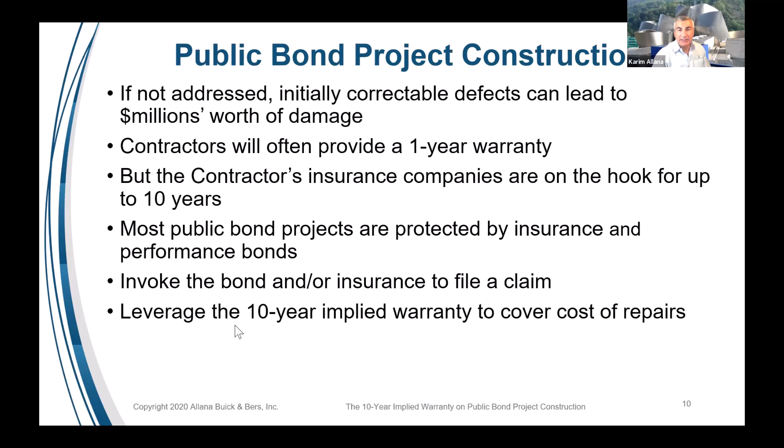So there are lots of mechanisms. I'm not a lawyer, so I'm going to skip this and let Ritchie really dig into this issue and talk more. But I wanted to bring it up because it's an important thing to understand, and there are case studies I'm about to go through that involved bonds, that involved insurance, and involved all of these things.

The common type of defects we see in new construction are water leakage—that's probably the number one, 70 to 80% of the time it's water leakage. The remaining 20% of the time it's air conditioning issues, cooling and heating issues, comfort issues, condensation, fire suppression systems not built right, and hot or cold water delivery systems. A lot of them are functional things, but the thing about leaks is that leaks get hidden.

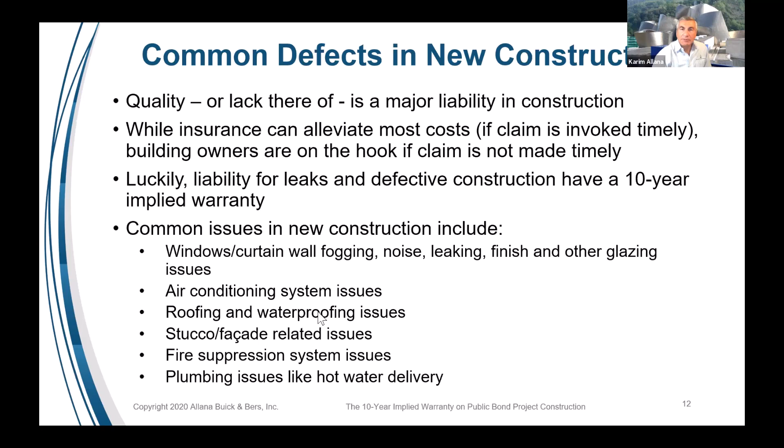Often a building fabric leaks and the water gets soaked into the walls and the ceiling assemblies. You don't see it on the inside. You look at the building and think you don't have any leaks, but the facade is leaking and the water is staying contained in a wall cavity. You open a wall cavity and it's full of mold, so it's something you have to really look for. It's not always obvious, and I'm going to talk about this.

This case is one of those where it's a community college, newly built from a bond project. It's been leaking, probably from the day it was built. And because the issues didn't change, the windows were leaking and the walls were leaking, and those leaks were going concealed behind the wall cavity, so most people would not even see it. And we'd gone through a big drought cycle, as you recall.

This project was completed in 2017 - in 2018, 2019 we had a drought going on during some of those times. Actually, the project was not completed in '17, I'm sorry. This project was completed in the 2012, 2013 timeframe - that was a typo. But it was not until 2017 that somebody noticed there was a problem. So it took 5 years after the project was built for somebody to notice the problem.

We're going to talk about it because it cost $12 million plus to fix, and most of that had to do with water intrusion. It's not a huge building - maybe a $35 or $40 million construction cost, I forget exactly. But it took almost 25% of the construction cost to fix it. So it's very significant, and it's important to understand.

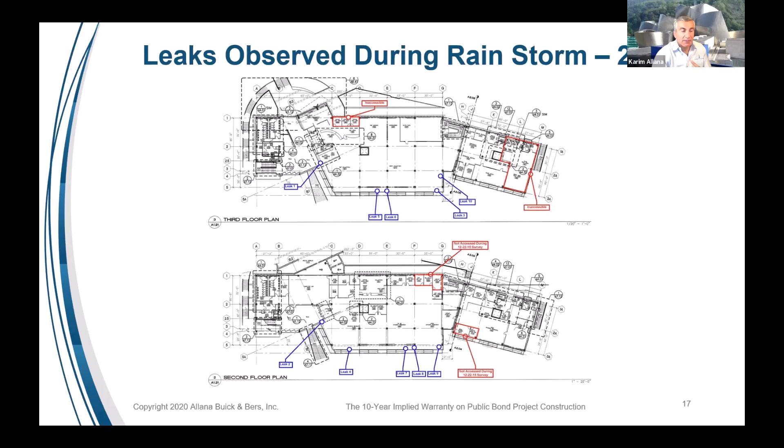In 2015, I think we had a very heavy wind-driven rain that happened in January - during that December rainstorm. It was December 22nd, 2015, when during that rainstorm, somebody happened to be walking through there and saw wetness. They put some protection down and took some pictures of leakage where they could actually see water coming through. But because of the wall coverings and all the sheetrock and insulation in the walls, these walls appeared to be all dry. Nobody really knew the extent of the damage.

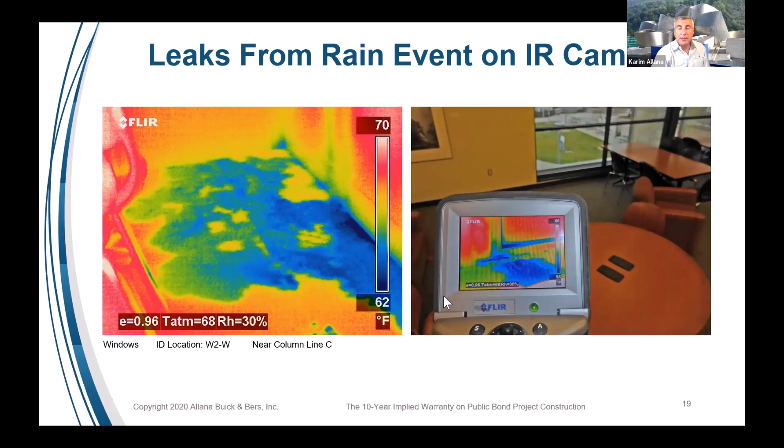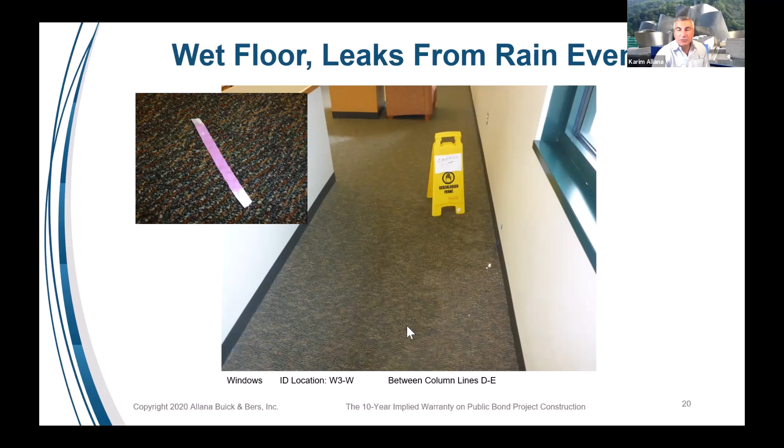So we were sent out in December to look at the leakage. The carpets looked dry visually - we couldn't pick it up. But when we put an infrared camera to it, you could see the dampness, all the water accumulating on the carpet. You can see they put caution signs up, and in the carpet you could kind of see where there's a damp spot. When we put a moisture sensitive strip on the carpet, it lit up - we knew this was really wet, and you could touch it and feel it. But this type of carpet really hid the moisture well, and with some small rains, nobody could really tell. It took years for this issue to even get discovered.

As with heavy rains, we started noticing some damage at the ceiling level, in the corner of the ceiling. We even saw some damage on the ceiling tiles, in one particular area where we had water underneath a podium or entrance plaza on the second floor. Underneath that entrance area, we could see some ceiling damage.

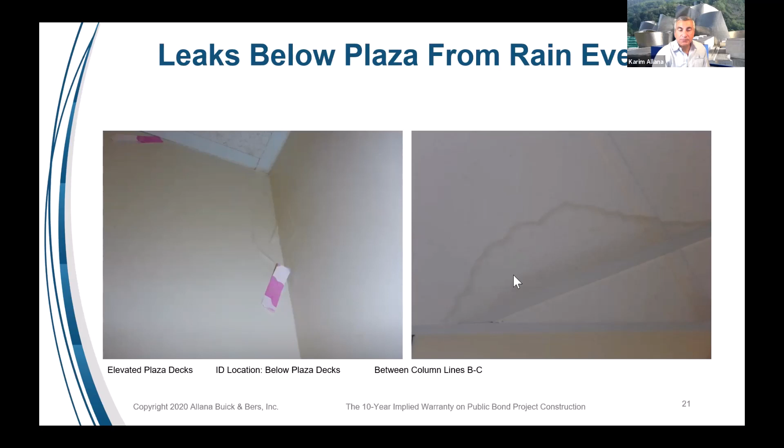So the district hired us to figure out what was going on. Part of what we did was a visual inspection to look at what was wrong, and we also did some water testing. We looked at this from a water intrusion perspective to see why the water was actually intruding, and we ran negative pressure testing. The negative pressure testing allowed us to see if there was leakage through the product, or leakage through the wall assembly, or what.

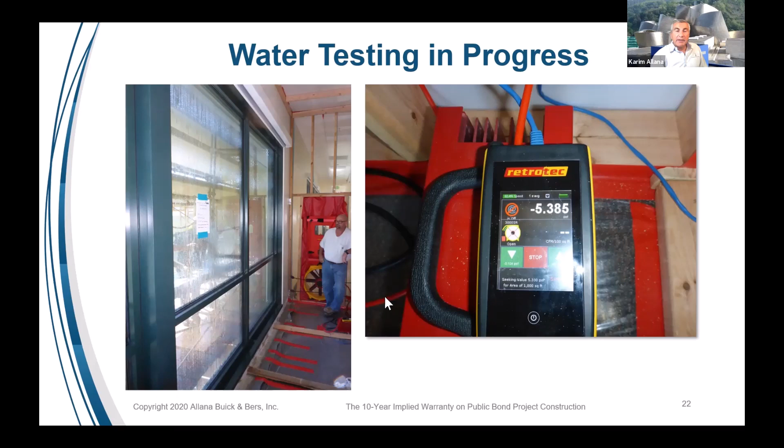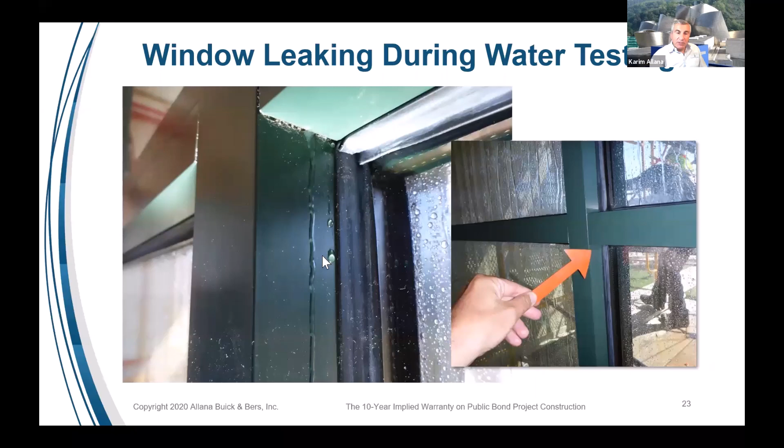And we could tell that some of the leakage was specifically coming from the product itself. There was product that was leaking, and there was water coming in the mid intermediate mullions, and you could see water coming down the wall through the window mullion.

So we put together a leak damage summary, and we identified every window, and did testing to see where the windows were leaking, if there was sheetrock damage, historic staining, and what the leak history was in different areas. We also did a spray test at different test pressures: 2.5, 4.18, 5.33, and 6.44 PSF. We wanted to see at what point these windows would leak, because sometimes these windows would leak during a heavy wind-driven rain, and some of the windows would not leak.

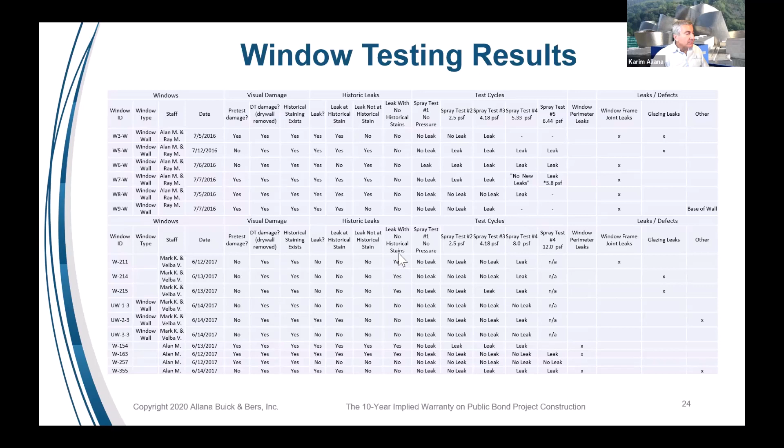Okay. So essentially, the project, we also did some destructive testing.

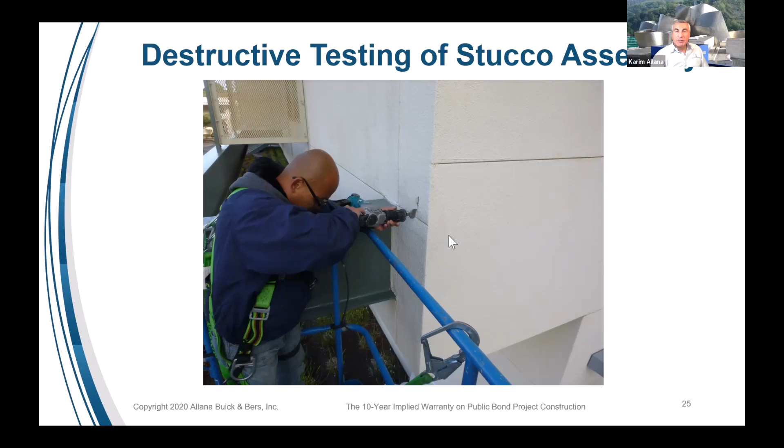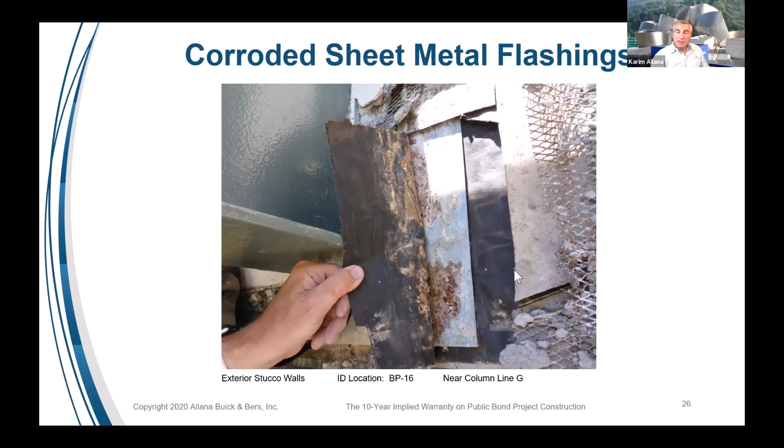We removed portions of the stucco and looked inside to see if there was damage. We did find some damage, and there was some rusted flashings. There was water intrusion that we could see behind it, and we looked at different conditions that were leaking, and the amount of damage was categorized and documented.

You could see that this is a soffit condition. There's water that's been coming in and collecting at the soffit. There's a lot of rust. There's a lot of fasteners that are rusted out. There's a lot of water accumulation here taking place.

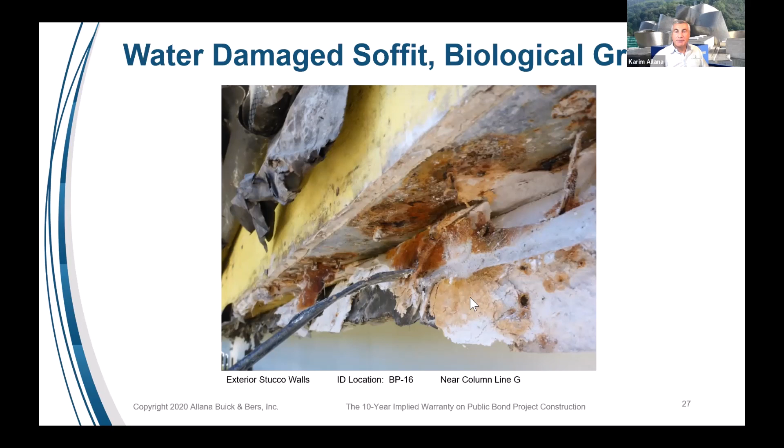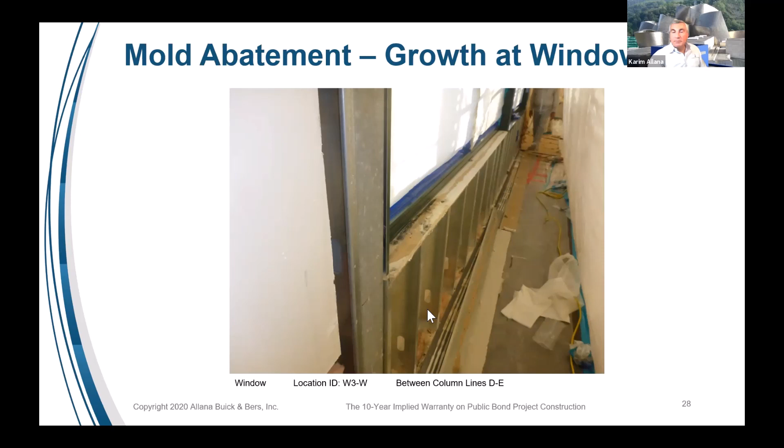And on the inside, you could see, once we opened up the sheetrock, that there had been some mold growth, and there had been some water intrusion that was happening underneath the windows and accumulating in the wall cavities. So all of the sheetrock that was affected and biological growth had to be removed and cleaned.

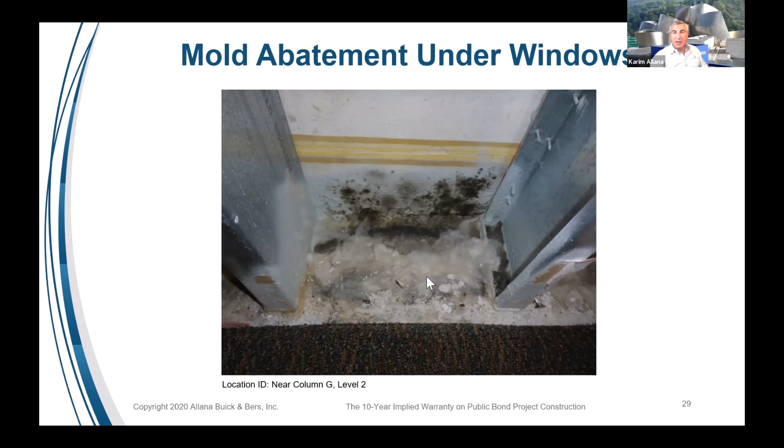So we looked at different conditions that were leaking, and this is a sunshade panel that was connected to the building there where water was intruding through.

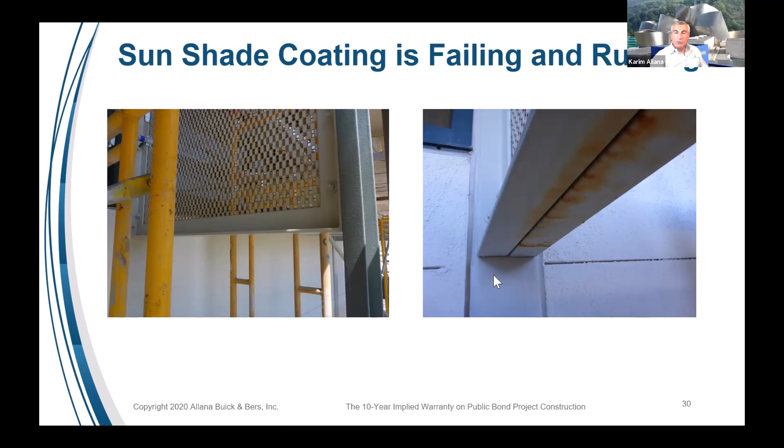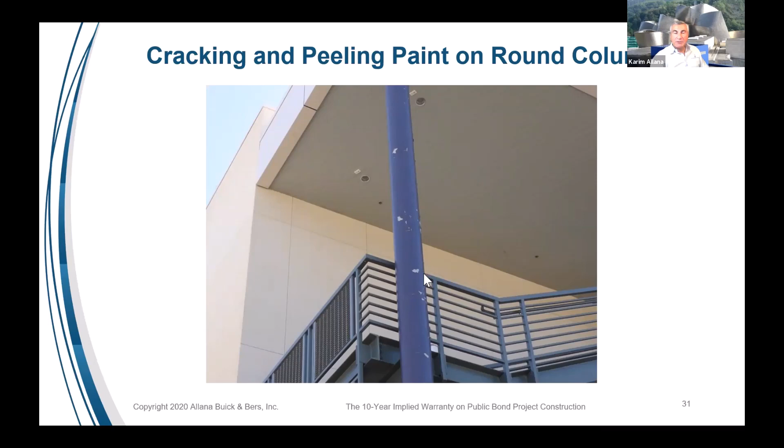And there were some other non-water intrusion type issues that were documented, like cracking and peeling paint or intumescent paint, which is a fireproofing type of paint. So it's important enough to make a note of and to repair.

So we went through and made a list of issues and basically said, okay, here are the things that are causing leakage. Here's a list of defective construction that we were able to assemble. And we use this just so we can assess a claim. We can go back after to the insurance company and see if we could get that money from them.

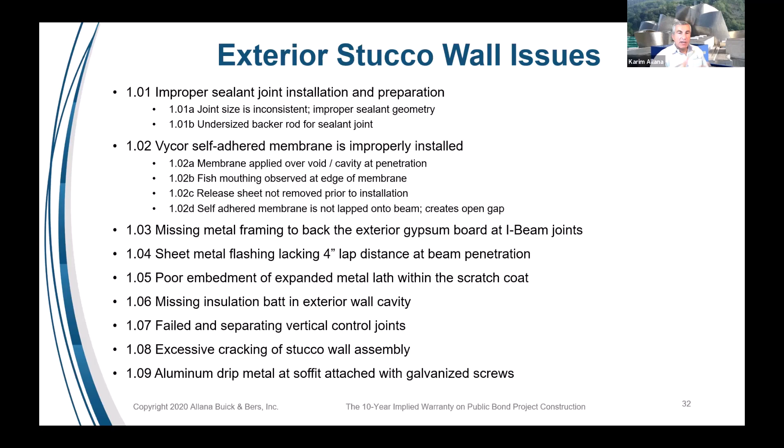And part of it is that the other experts, the experts that the insurance company hires, they want to see if this claim is real and what's wrong with it. So this is an example of the type of list that we would put together based on the investigation, and a list of window issues that you would put together for part of the claim.

I'm not going to get too far into it or even talk about what's the name of the project. Some of you might recognize the project, but this is really more educational than anything else. So I'm not going to get into too deeply into specifics of the project.

So somebody had asked if there is a window warranty relative to the pressure. Let me answer that question.

So windows are designed and labeled and tested. And the architect may say, hey, I want a window for this project that's going to meet an 8-pound wind-driven rain requirement, 8 PSF wind-driven rain requirement, and it's going to resist 30 pounds of structural pressure from the wind. So the architect puts that in the specs.

The contractor is not required to build it exactly that way. Now he may submit a window that not only meets 8 pounds, he may submit a window that meets 12 pounds, so it exceeds the architect's requirement. Or he may submit a window that meets the 8-pound requirement. So that becomes the basis of what the performance of the window is.

It's like saying I have a beam that can handle 2,000 pounds of weight, and that's what the beam is designed to do. So if you want to test it, you should test it at, let's say, 2/3 of that pressure to make sure that it can hold up, and so you test it at that pressure. The industry says that for windows, you typically, in the field, test it at 2/3 the published pressure that the manufacturers publish.

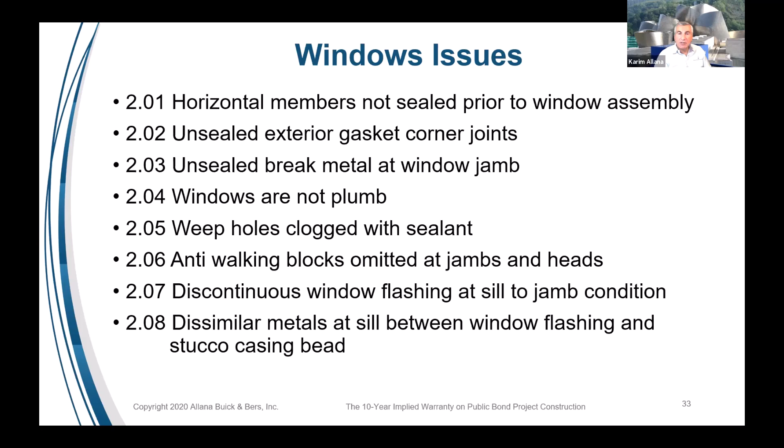So essentially, the decision was made based on what we had found on how to fix the building, and portions of the buildings were demolished, and windows and flashings were replaced. Windows were actually repaired, and the goal was to fix the windows as opposed to replace them. But I think in the end it became impossible to repair them, and they got replaced because it was just not practical to fix them.

But some of the windows that can be disassembled and reassembled, often called storefront style windows, can often be repaired if they start out as good windows with the proper wind-driven rain resistance. So we always look for the least expensive way to repair things.

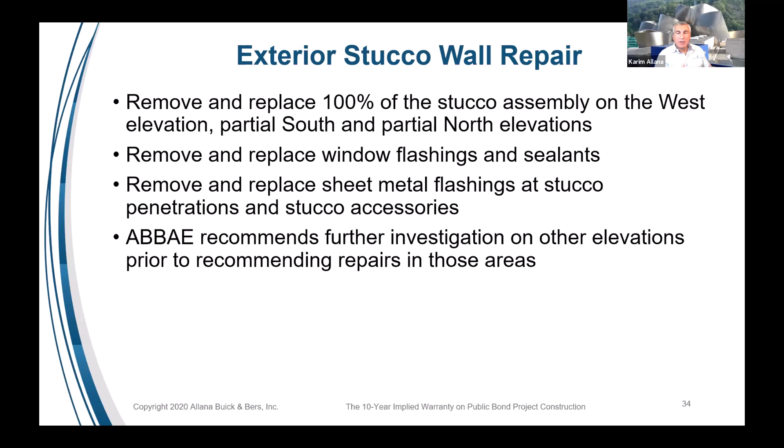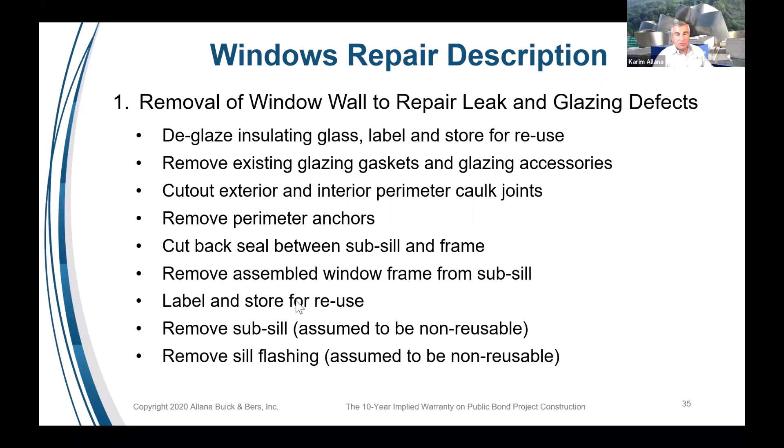So here's some of the defects we saw and some of the repairs that had to be done. Initially we were thinking about repairing the windows, and if we were, this is what we were going to do: deglaze it, remove the existing gaskets, cut out interior perimeter sealant joints, reassemble them, reseal them properly, and reinstall them. So it was basically a reinstallation and repair of the window as the original scope of work.

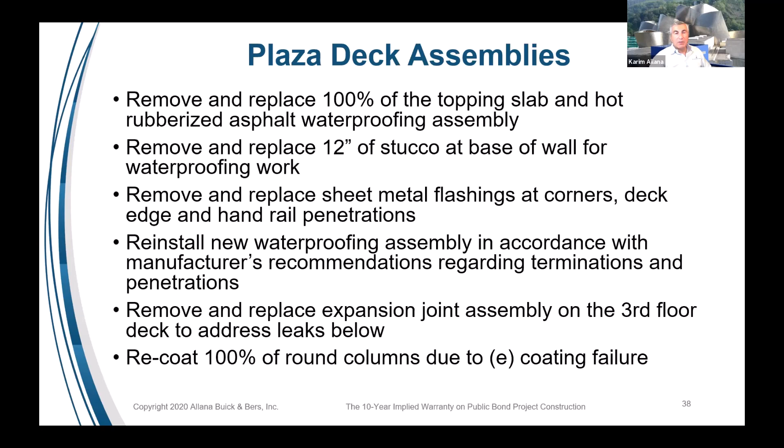As for some of the other items, there were scopes associated with sunshade panels, stucco, sealants, paint, some parts of the roofing, and the plaza deck. All of these had to be addressed, and we investigated all of them. We repaired them, with repair descriptions given for all of them, and we prepared a set of construction plans for the repair. It required DSA approval, and DSA provided approval.

The district went through a public competitive bidding process, and we assisted with a couple of pre-bid conferences. The bids came in over $12 million to fix it. The district chose to proceed with the start of construction before the project was settled, and before a settlement had taken place with the insurance company.

At this point, this case did settle, and the district got the money in settlement. It's confidential—I'm not going to tell you which district it is, and I'm not going to tell you what building it is.

I just wanted to use this project as an example of what the process looks like, rather than get into specifics about any district or any particular building. If you happen to recognize it, great, but the object here is to teach without disclosing any potential secrets about the project. All this information I've given you is public information—these are public projects, you can easily find them, so I'm not giving out any kind of secrets, I hope, for anybody.

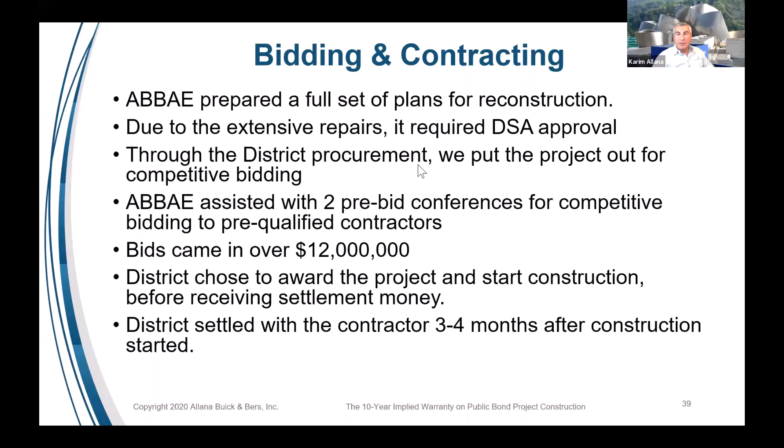So for my second example, this is a performing arts center that was leaking. It's a new college, or a higher education facility, I'll just say that.

The funding sources, the cost of repair on this was over $24 million. It's an auditorium, a 106,000 square foot facility.

It had a lot of issues with the exterior skin that was leaking. There was glazing and curtain wall leaks, there was some roofing leaks, and there was water intrusion from the slab on grade. There were a lot of different issues.

When we first got hired, it was for just one thing, that they had some minor leakage through the exterior facade. Some of the facade stone veneer were leaking in certain areas, and that's all they could really detect, so that's what was looked at.

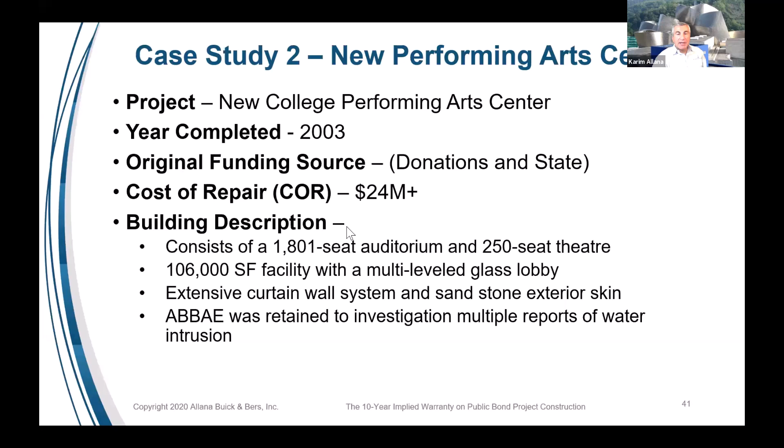But as we got involved, the investigation and negotiations with the other side took years, and we were able to find and see that there were many other issues.

There were balconies up above that were leaking. The curtain wall actually wasn't leaking originally, but 5 years, or 4 years into the building, the curtain wall started leaking.

We just happened to be still on the project investigating other things, and a brand new curtain wall leak showed up. We investigated and found it had to do with shrinking gaskets for the curtain wall.

The common thread between this project and the previous project I gave you was that the gaskets actually shrank on both of those projects. The gaskets take a few years to shrink, and once they shrink, the window system starts leaking.

This was another case, actually one of the first cases we saw of this. This is an older project where the gaskets were shrinking and leaking, and today we see this defect pretty commonly. This project also had some issues with sunshades as well.

So some similarities, but the stone veneer walls were the main issue with the project, and the veneer walls were leaking. This was essentially a cement board installed over metal studs.

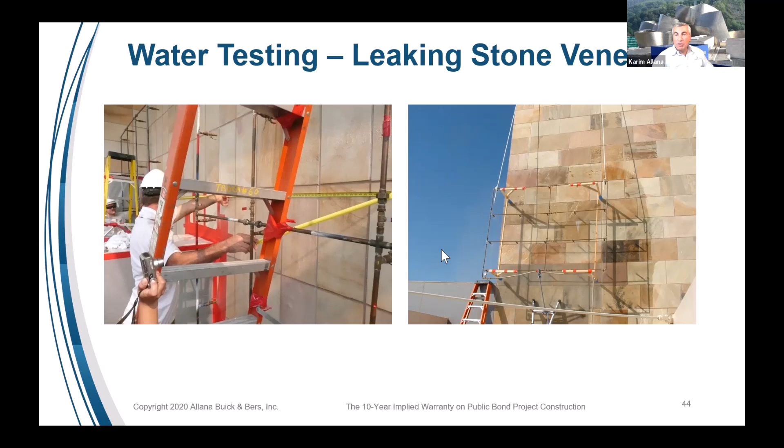But the test is usually anywhere from 15 minutes to 2 or 3 hours. So we can't simulate the whole rain, but we can put enough water on it in a certain prescribed manner to simulate the leakage. And sure enough, when we did that, this is the backside.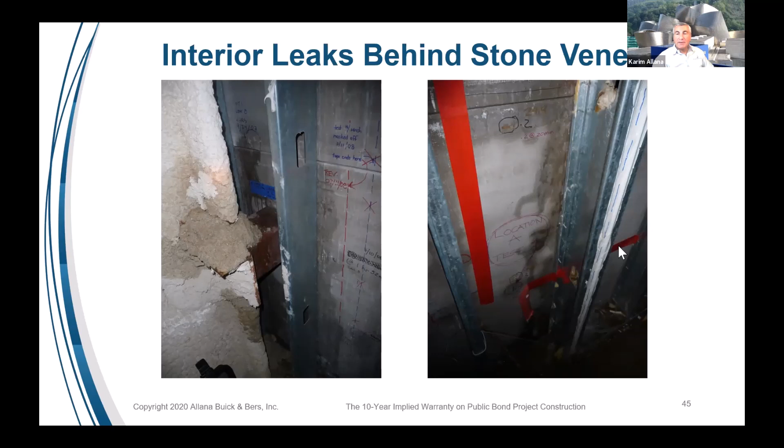You can see rust forming on the back of it. You can see that there's leakage occurring through it, and you can see the water seeping down at certain penetrations, in certain locations where there are windows and pipes and other things that penetrate.

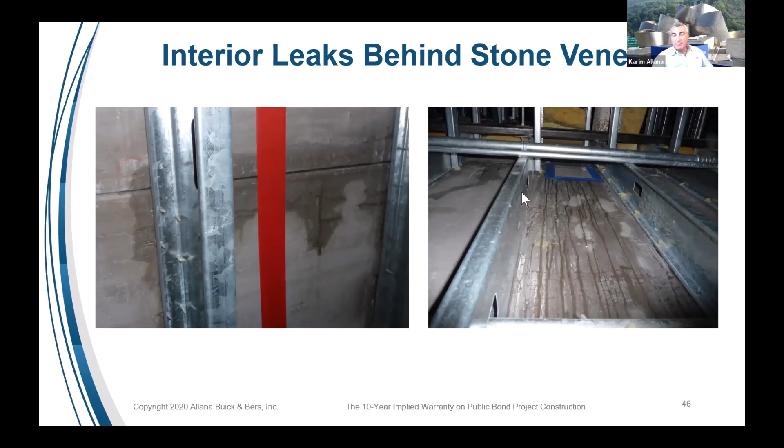But there's also water coming right through the joints in the cement board. When the waterproofing was applied to the cement board, they really needed to double up on the waterproofing at the joints. It's supposed to put thin set over the joints and smooth it out, then put a mesh and an extra layer of waterproofing at these joints so that when the joints move, the waterproofing membrane doesn't split. But the waterproofing membrane as a whole wasn't installed properly, and there was nothing we could do about it, but that's what was leaking.

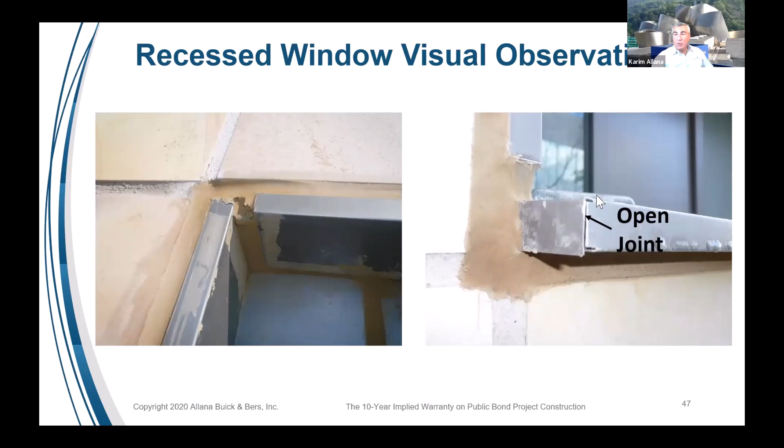The other things we saw were, once again, problems associated with the window itself - how the window was assembled. There were joints that were open, panels that were open, and water was getting through them. Like before, we saw water intrusion that had historically been taking place. This wall cavity was filled with insulation. We took the insulation out, and after removing it, we could see the mold growing on the backside of the walls.

Without removing it, in fact, when we picked this window, we didn't know it was leaking. We had no idea - all we were doing is randomly selecting windows. We were randomly selecting locations that didn't even have any previous leak history. Nobody had informed us that they had experienced a leak. But we randomly wanted to check the whole building.

Now that we knew that portions of it were leaking - portions we could see were leaking - we wanted to see how extensive it was. Let's go look under windows, let's go look adjacent to a deck, or adjacent to where the curtain wall meets the wall. Let's go look at the roof interface with this stone veneer. So you look at all the conditions to see, is this problem localized or is it pervasive?

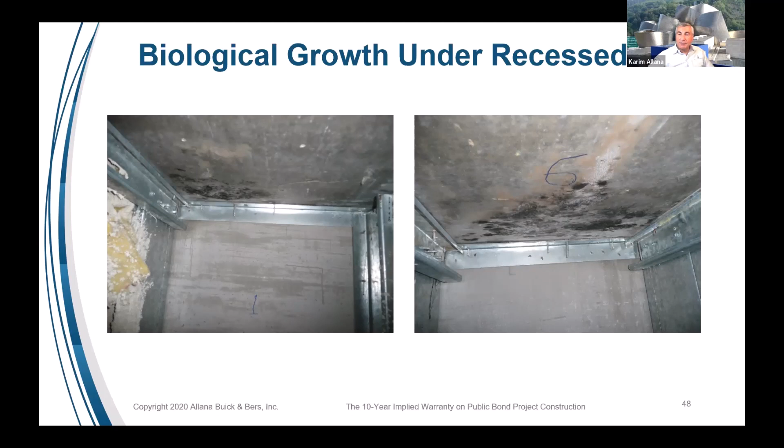And it never manifests itself inside, okay? So you can't assume the building is watertight just because you don't see a puddle inside the floor. If there's no liquid water sitting inside the floor, that's not a reason to believe the building is watertight. Turned out that this building had quite an extensive amount of leaks.

And when I mentioned curtain wall, these leaks actually took a few years to start. Once again, it was a high wind - a 30-mile-an-hour wind hitting the curtain wall directly - that caused this leak. This curtain wall did not leak under normal rain. You could go through weeks and months of normal rain and it wouldn't leak. But with a high wind-related storm, only then would it actually leak.

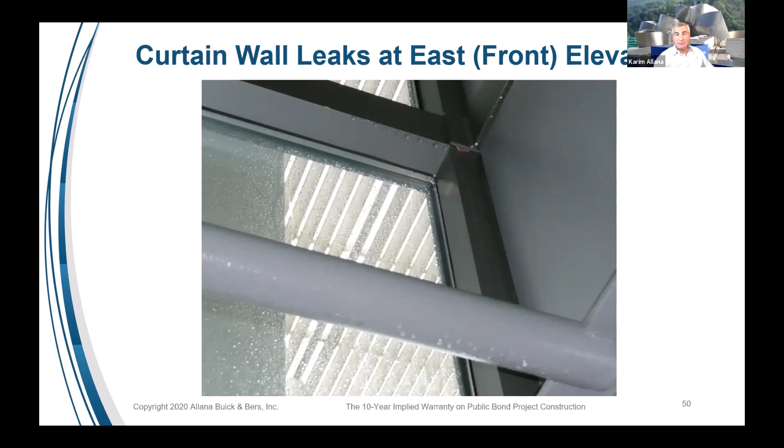So this was brought to our attention that leaks were found. Owners took pictures of it and sent them to us, and we then investigated. We actually went out during rainstorms - when we knew there was going to be wind-driven rain, we went to the site and took pictures of water intrusion that had sprung up in the curtain wall assembly.

Now that we knew the curtain wall assembly was leaking, we did full extensive water testing. We set up spray chambers, did full assembly testing, to figure out why it was leaking. We've got some questions - let me read the questions.

So there's two questions. One of them is, how was the membrane installed incorrectly? The second question is, would a thermal scan from the interior have shown evidence of additional leaks and moisture, as in the last case? Very, very good questions.

It turns out that the membrane was too thin - that was defect number one. The membrane, I believe, going by memory, was supposed to be either 12 or 14 mils in the field, and it was supposed to be doubled up and reinforced in the joints.

So the doubled up and reinforcing was missing, and the membrane thickness was between 3 and 5 mils. So the membrane itself was installed at less than half its required thickness. And as you know, cement board has little holes in it, little gaps in it, and you can't bridge those things with a very thin membrane. You're talking 3 mils is about how thick your paint is. Okay, a normal paint on a house is about 3 mils.

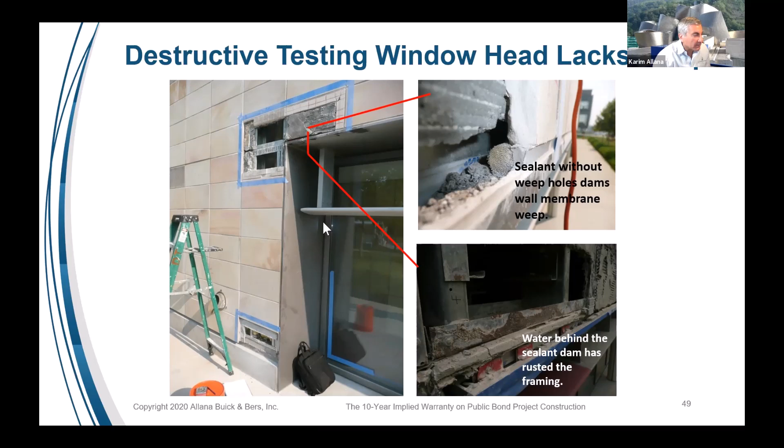The first thing we did, we didn't put a spray rack in first. We just flooded the outside. Not flood, but just put a hose and let water run on the outside, and that water leaked under the storefront and came right in. Then we sealed those areas and we put a spray rack to see if the window wall itself was leaking.

And it turned out it wasn't. The window wall itself was not leaking. It was only the interface of the window wall to the slab that was leaking. And there was no curb between the inside and the outside. The inside and the outside are about the same height, and water was able to just laterally move in.

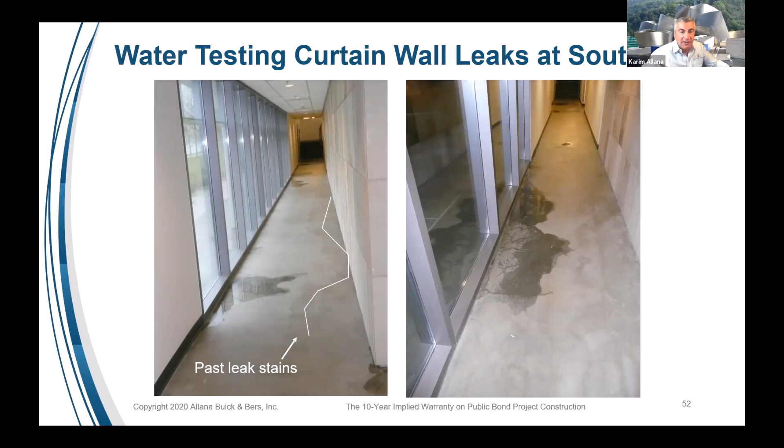And in some cases, what we saw is that the slab edge would get wet, and the slab edge would then transmit water through cracks, even though liquid water wasn't showing up here. You can see a sealant joint on the back. So liquid water was being held back by the sealant joint, but nonetheless, these slab edge cracks were picking up water, and the water was filling up these cracks and coming through these cracks.

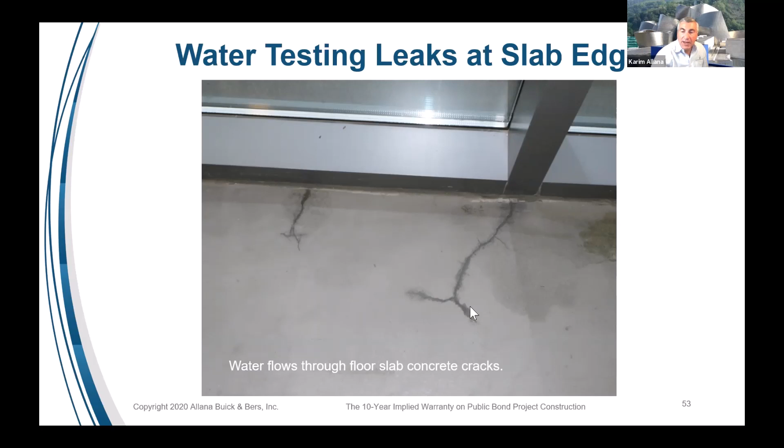So the first thing is, once again, we go through and thoroughly document the leaks that we can see, either through a thermal camera, visually, or through some staining, and we were able to document 167 instances of water intrusion that we had to carefully look for. A few of them were brought to our attention by the district as they started happening. But we went through very thoroughly and we looked for them, and we found all of these locations.

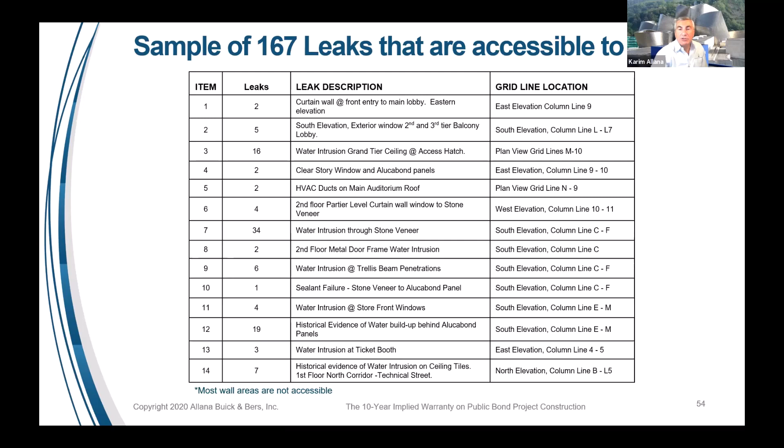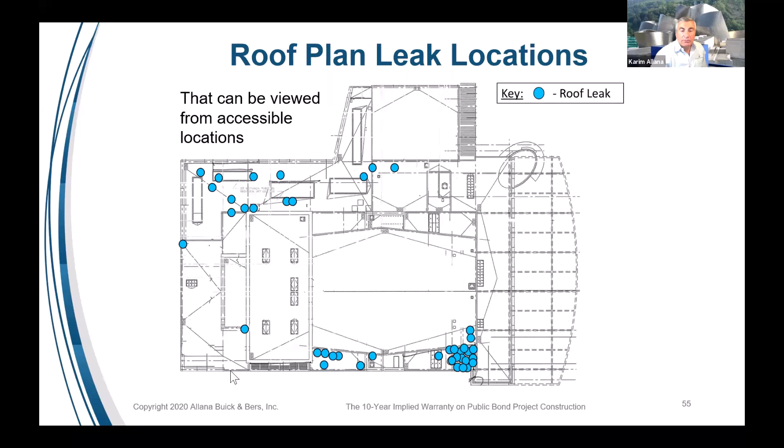And the resolution was that this particular subcontractor felt that he had received improper, poor quality gaskets from the manufacturer of the window wall and curtain wall system. It's an American curtain wall manufacturer. If I gave you their name, you would all recognize their name. I'm not going to give you any names.

But the point was that they reached out to the manufacturer, and the manufacturer simply said, no, not our problem. You must have done something wrong. The glass you put in must have been too thin, so it doesn't properly provide the gasketing, and we didn't supply the glass, you did. It's your fault. And we knew that was not the case. We knew that there was shrinkage happening.

This particular subcontractor, I was so impressed. He took it on himself to go out and remove all of those gaskets. They coordinated with us as to what they were replacing it with. They gave us submittals and shop drawings for the new gaskets and the new sealant joint. And the district gave them permission. We put in all new gaskets, both inside and out, and all new sealant joints. And the leaks completely went away.

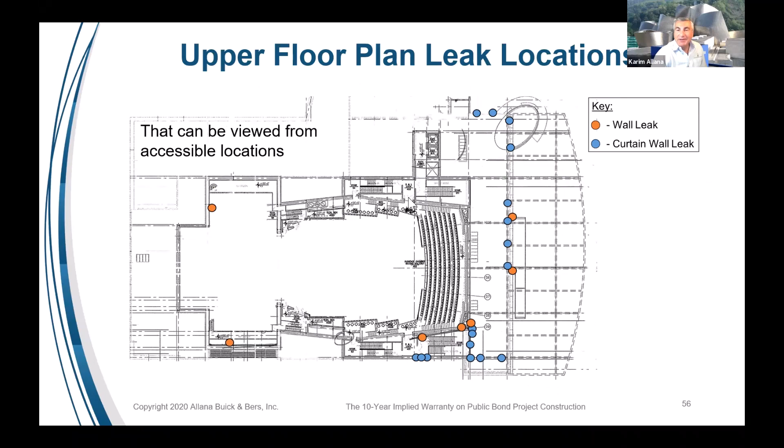So here's the resolution of how this happens, right? The district pursues a claim against the bonding company. This district chose to do this because of their legal strategy and their lawyers, and I'm not a lawyer, you can ask Ritchie when he gets on as to what his opinions are. But this district chose to pursue this only against the bonding company, and the bonding company has so much pressure because they have to fix this.

This was a new enough construction, and so they hired us to perform the forensic testing and to do the reports. And once we did the testing, a lot of the other experts got involved. They all appeared at the job site. They all saw our testing. Everybody was able to see what was going on. And based on our observations, we prepared construction documents. Originally, we thought we were going to get this done through outside contractors, and so we got contractors to bid on this work.

And I want to say that the cost of repair was in excess of $24 million. This was more than 10 years ago; this is an older project. Today, that cost would have been probably over $50 million. The cost of construction has really gone up. And so the bonding company and the contractor agreed to fund it through the insurance. They all got together and they funded it.

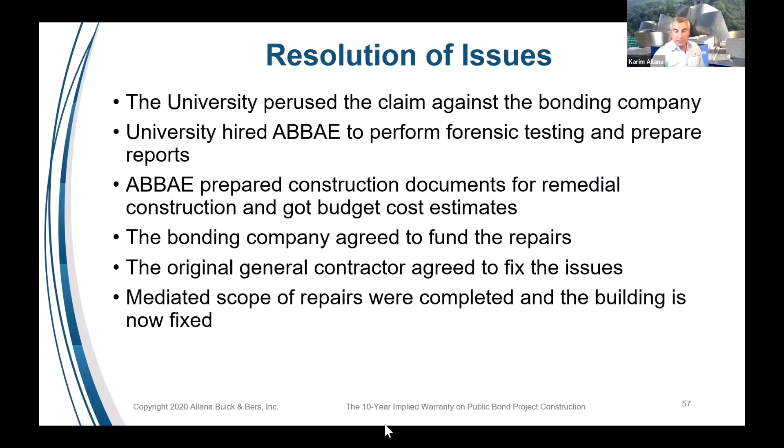I'm going to go into the next step, which is the importance of doing do-it-yourself inspections. Most of you have busy lives like we all do, and COVID's made things even more impossible for everybody. If you own new construction buildings less than 10 years old, you've got to do inspections. You've got to start with your own inspection, and be very, very thorough about it.

Like in the last example, all they had seen were 2 instances where you could observe moisture behind the stone assembly in a storage closet up on the 4th level. You open the door, go behind it, and you could see the open studs, see the veneer from the inside out - and only there were they able to see the water, nowhere else. They knew it was bad enough that they brought us in.

Often what you see is the tip of the iceberg. Don't assume that if you have one tiny leak, that means you have just one leak. What I've seen, having worked on thousands of these projects, is that a tiny leak is 99.9% of the time the tip of the iceberg - because more than 95, 98, 99% of leaks are hidden, concealed in the wall cavity. So what you're able to see is just a tiny fraction.

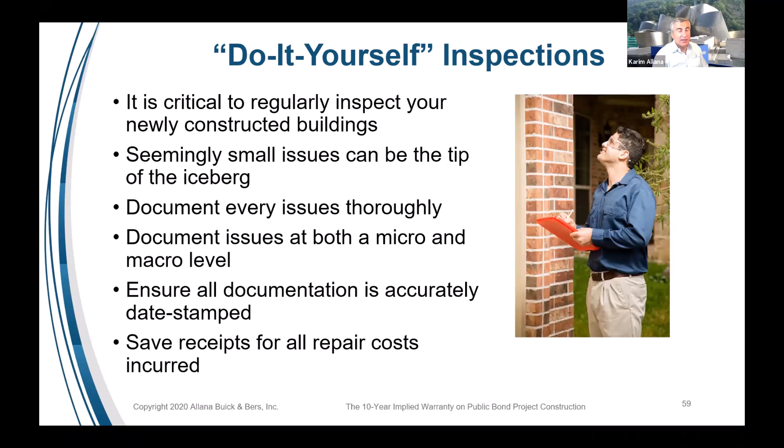Here's how I recommend documenting it. Take overall shots, like the bunch of overall shots of the building I showed you guys. And then on the overall shot, you can make a little mark and say, here's where the problem was. Then walk into the room where the leak is happening, take an overall shot of the room from the door. Then get close up to the window where the leak is actually taking place and take pictures of the window.

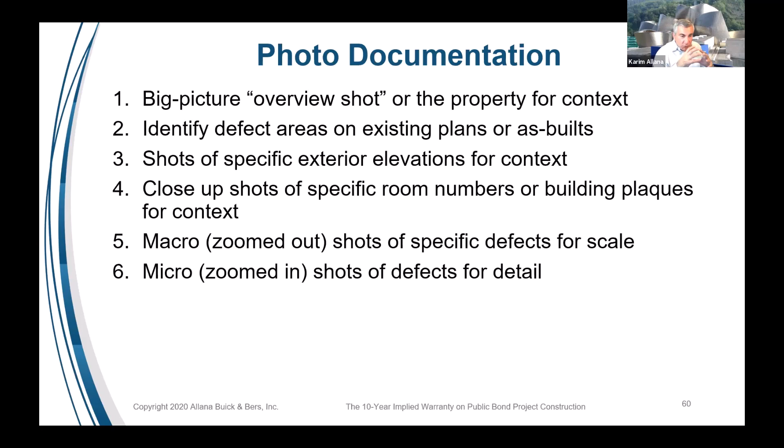So when I look at it, or when an expert looks at it, they know precisely what part of the building is leaking. The mistake people often make is they take a lot of micro photos - that's the zoom-in part - and they don't take a lot of macro photos. So it's really important that you start with macro photos.

For instance, you could take an overall Google shot, okay? And in Adobe Acrobat, PowerPoint, or even Excel or Word, you can mark it up and say, I got a roof leak right here. That's a good form of communicating the big picture to me or to anyone. This is a macro shot, an overall shot, and it shows the overall elevation of the building.

And if there's a leak down here at a curtain wall, then you can highlight that area and show 'leak at this location.' Doing something like this, even if they're hard copies that you marked up, or photographs that you've digitally marked up, is really, really helpful. So these overall shots and macro shots are really helpful.

The other thing I do as a habit is, if I'm photographing a leak stain in a hallway, I'm going to take a picture of the room number first, and then I'm going to take a picture of this leak, so I know which room this leak is associated with.

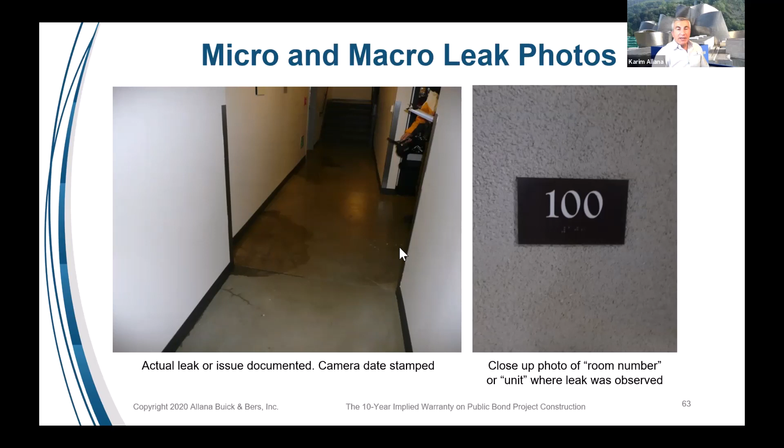Okay, terrific. So in that case, I'm going to turn it over to Ritchie, and I'm going to let him talk about his perspective on this. Go ahead, Ritchie. Thanks, Karim.

Appreciate it. That was very thorough, and I learned a lot even, so that was great.

Again, my name is Ritchie Lipson, and if you could go to the next slide, that'd be great, Karim. And maybe one more slide after that.

Well, I think I've already introduced Ritchie, and I just want to say that his firm and Ritchie and some of the lawyers I work with there are truly amazing.

They're very knowledgeable people, very results-oriented people, and so I'm very impressed with them, and I'm happy to be jointly working to do this seminar just to get your legal perspective, Ritchie. Thank you. Go on.

So just a little bit about our firm. We have been in business doing construction defect work for 30 plus years. We have offices throughout California, Northern California, Los Angeles, Southern California.

We're in Phoenix, we're in Albuquerque, New Mexico, and in Honolulu. Over that time frame, we've collected more than $1 billion for our clients.

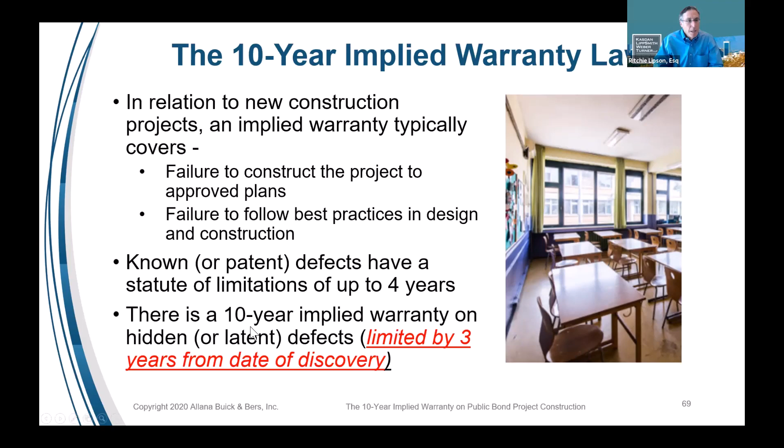Let's go to the next slide and talk about the specific statutes, Karim. There we go. So in California, when you bring a claim for negligence, and that's really a standard of care type of argument, the contractor, the subcontractor, the architect, the engineers - their work fell below a standard of care.

That time frame to bring a claim under negligence theory is 3 years in California. Then we talked about contractual warranties. You have a contract that might have express warranties in it. If you're going to bring a claim under a breach of contract theory, it's 4 years in California.

Then the implied warranty is kind of divided into 2 different time frames. One is for patent or known defects, and the other is for latent defects, things you can't see. If they're open and apparent, a patent defect, the time frame to bring the claim is 4 years. The implied warranty that we're talking about, and we based this whole seminar on, is a 10-year limit for things you can't see.

Now, the important thing to know is that all these claims are really based on a discovery basis. So for the latent defects, when you knew or should have known, the time frame starts ticking, and that's a limit of 3 years from discovery. So like Karim said, if you're doing inspections and noticing water intrusion, there might be issues already showing themselves in the building that are defective, and arguably, this is a defense the other side has, that they're going to start saying well, you should have brought those claims within 3 years.